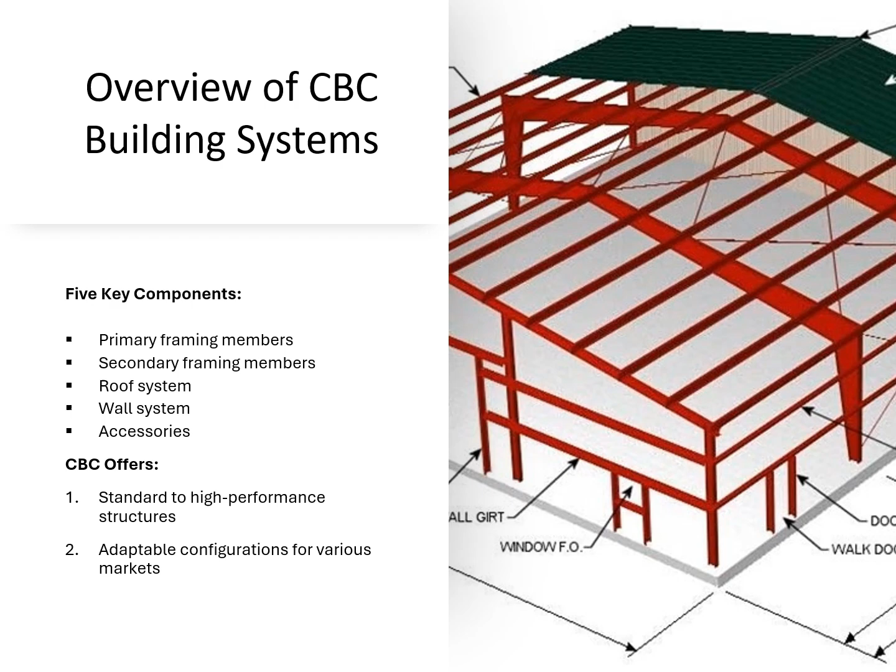At CBC, we offer a wide range of buildings, from those meeting industry standard requirements to high-performance structures with innovative architectural refinements. This versatility allows us to meet our customers' diverse needs and satisfy their unique preferences.

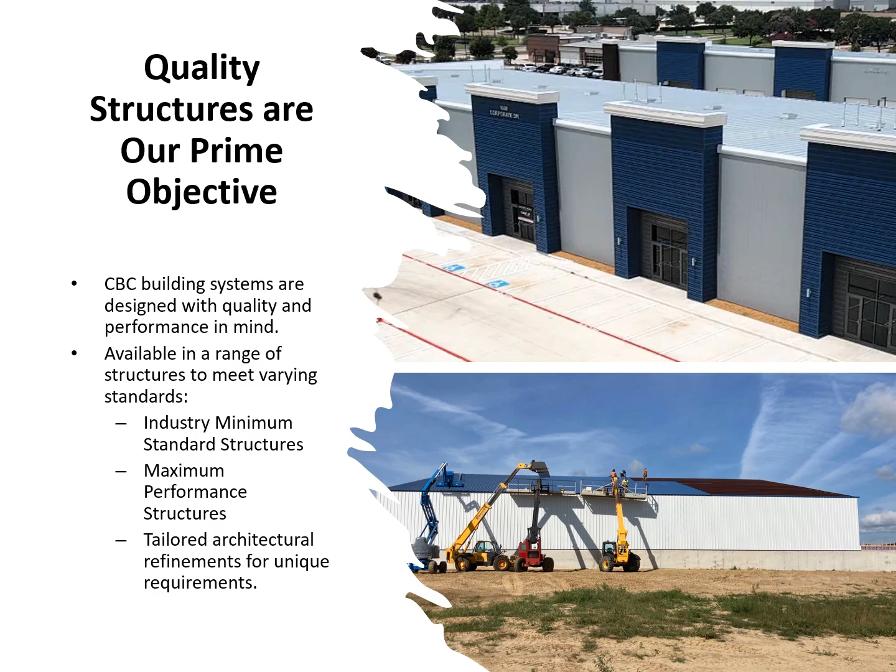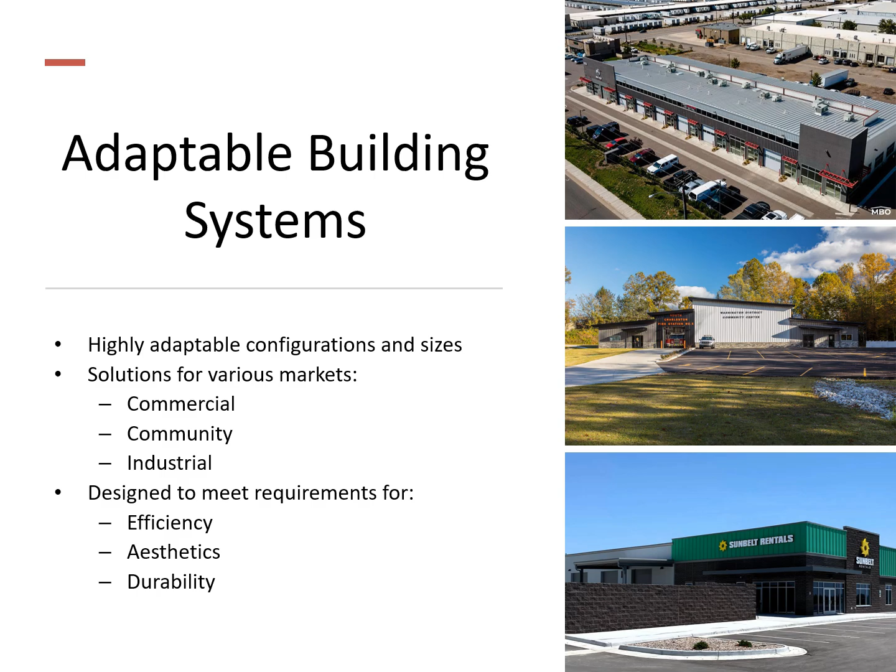Our building systems are also highly adaptable. With various configurations and sizes, they provide solutions for various markets, including commercial, community, and industrial applications. Whether you're looking for efficiency, aesthetics, or durability, CBC has a building system designed to meet your requirements.

In our business, you will often hear the word standard. Standard is a term that is often misunderstood in our industry. For manufacturers like us, a standard is simply a benchmark or starting point for a typical structure, a set of guidelines that help ensure all the parts fit together seamlessly to create a finished product. Most of the time, these are items that are fabricated on the production line and are typically what customers buy.

What happens when a customer needs something non-standard? That is not a problem for our team. In many cases, we can accommodate that need. Our engineers often say, "Nothing is impossible."

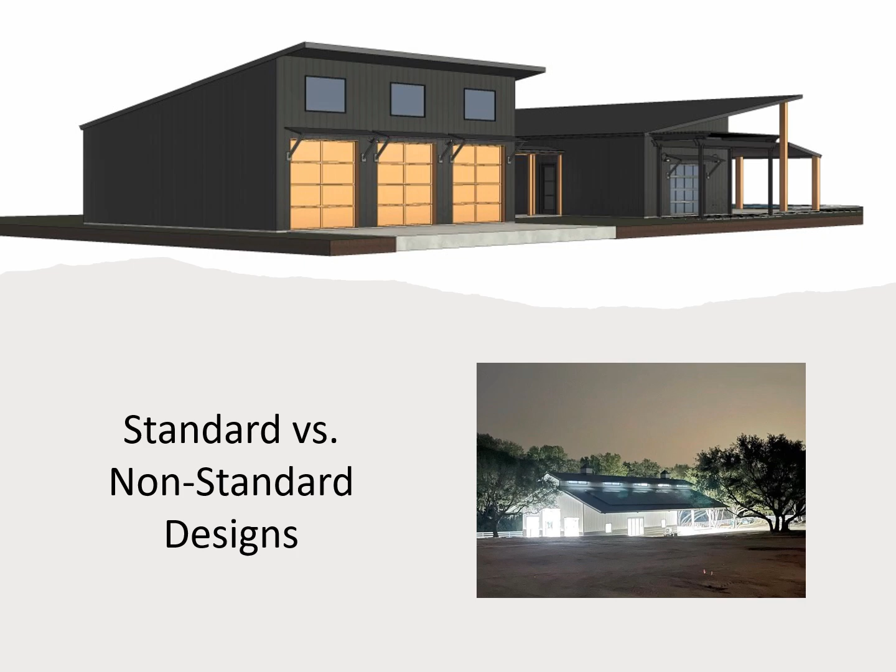Going off-standard can sometimes mean extra work, additional costs, and more time. In many instances, the adjustments are minor, but there are those occasions where the design engineering can get very complex.

Generally, we'll be talking about our standard products, but there are occasions when modifications can be made to meet a customer's specific requirements. Builders might handle these changes through fieldwork or by us directly at the factory.

Here's an important note. Any variation from the standard can impact key factors like loading, strength, and overall design. That's why it's crucial to have these changes reviewed by qualified professionals.

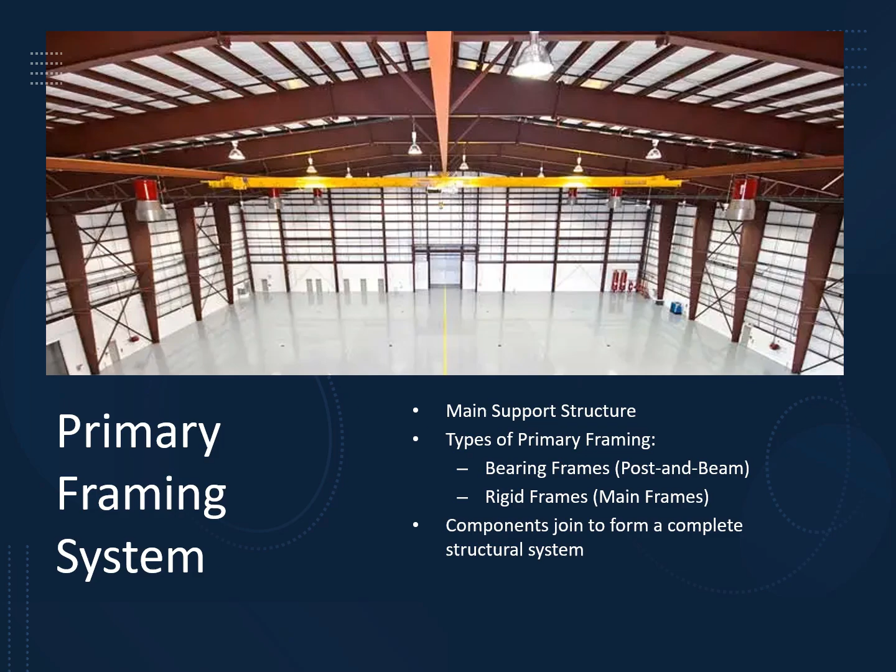Now let's dive deeper into one of the key components of our building system, the primary framing. This serves as the main support structure of a building. Examples of primary framing include bearing frames, also known as post and beam systems, and main frames, such as rigid frames. This section will explore the main frame as a primary framing system and discuss how it works alongside secondary framing members and bracing. These components join to create a complete structural system, ensuring strength, stability, and overall functionality.

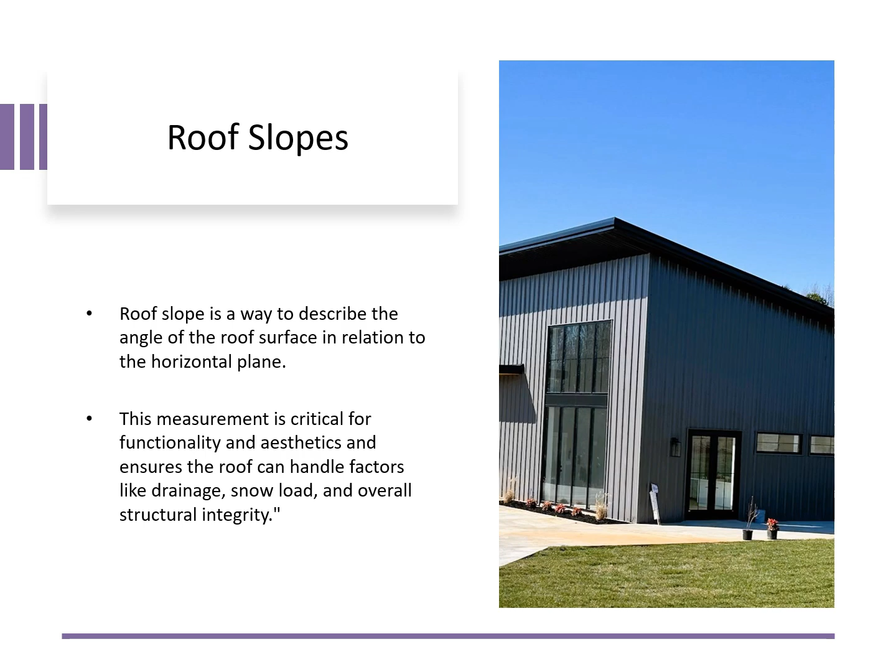Next, let's talk about an essential aspect of building design: the roof slope. Roof slope is a way to describe the angle of the roof surface in relation to the horizontal plane. It's typically expressed as a ratio, like 1/2:12, 1:12, or 4:12.

But what does this mean? Using inches as the basic unit, a 1:12 roof slope means the roof rises 1 inch for every 12 inches of horizontal distance, measured from the side of the building to its peak. In simpler terms, roof slope represents the angle of the roof, how steep or flat it is. This measurement is critical for functionality and aesthetics, and ensures the roof can handle factors like drainage, snow load, and overall structural integrity.

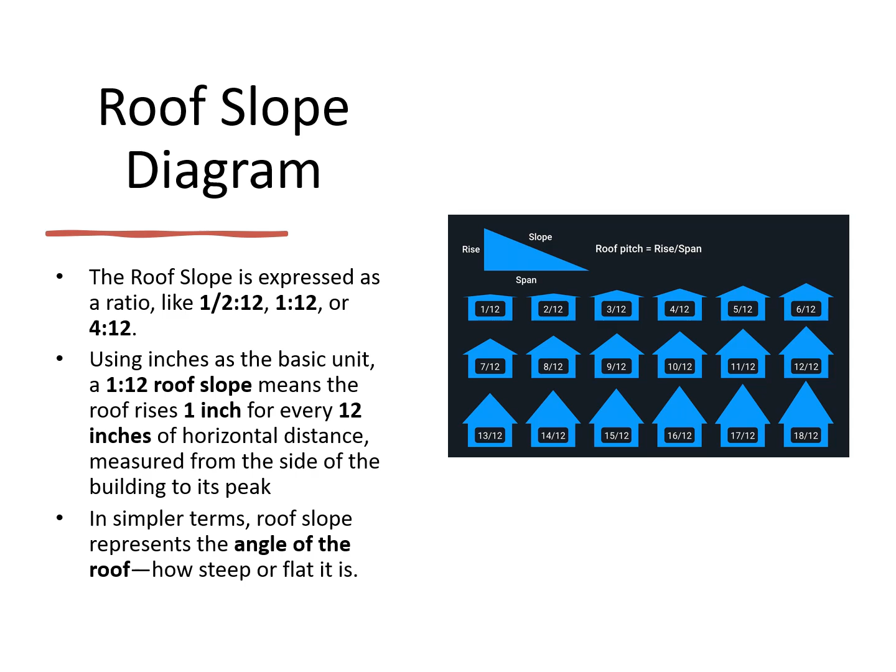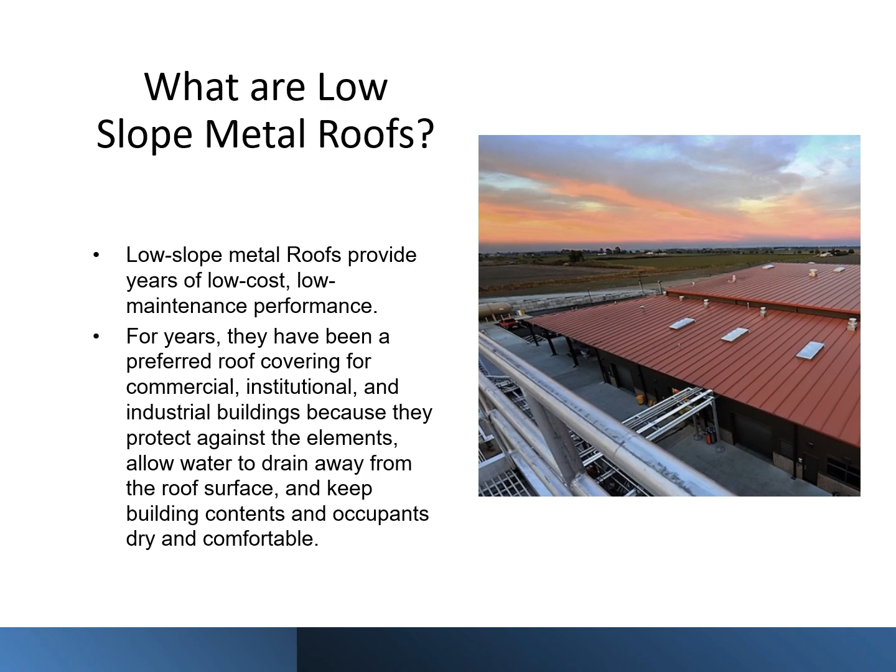Low-slope metal roofs provide years of low-cost, low-maintenance performance. They have been a preferred roof covering for commercial, institutional, and industrial buildings for years because they protect against the elements, allow water to drain away from the roof surface, and keep building contents and occupants dry and comfortable.

Steep-slope metal roofs offer long-term performance as well as long-term beauty. More owners and architects require an attractive and affordable steep-slope roof covering for commercial building projects, and more will likely choose a metal roof.

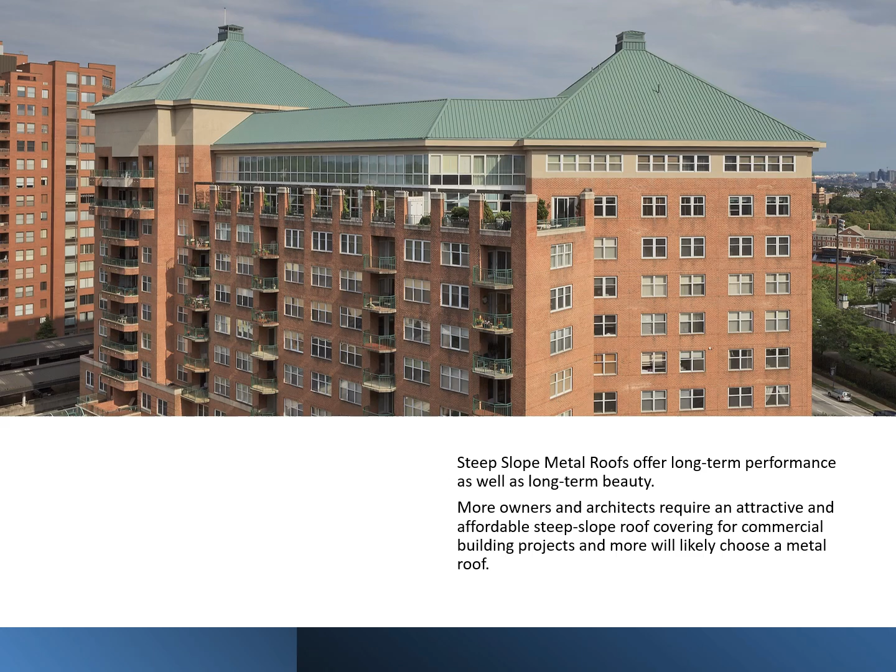Now let's focus on the main frame, also known as the rigid frame, which is the primary structural member of the building system. The rigid frame is unique because of its structural stability, which comes from the rigidity of its connections. Each member is joined so that the entire frame works together as a single, cohesive unit, distributing loads evenly and ensuring durability.

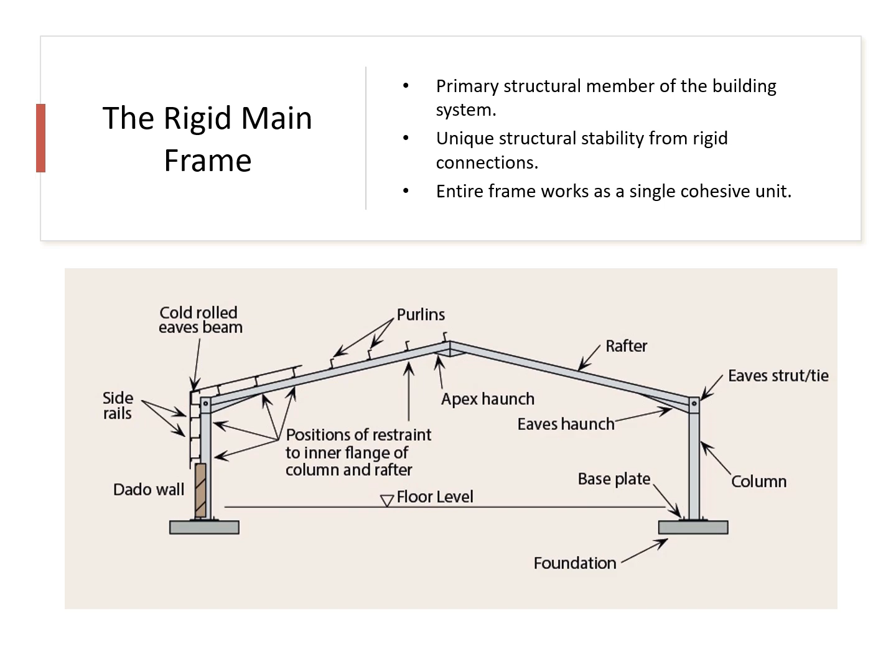Let's take a closer look at the knee haunch area of the main frame, which plays a critical role in the building's structural integrity. This is the deepest section of the main frame, making it the strongest part. The design is primarily driven by the need to handle vertical loads, but it also provides the lateral strength needed to resist forces like high winds or earthquake shocks.

What does this mean? This means the strength built into the frame for vertical loads is also available to carry lateral loads. The inside flange of the knee is under compression, creating a thrust at the inside corner that is both upward and outward. To counteract this, stiffeners are used.

These stiffeners extend to the outside flanges and also work to stiffen the entire web, while the haunch connection acts as an additional stiffener. The knee haunch area is where the column connects to the roof rafter. This connection rigidly ties the members together, allowing the structure to act as a single unit that supports all loads, whether vertical or lateral.

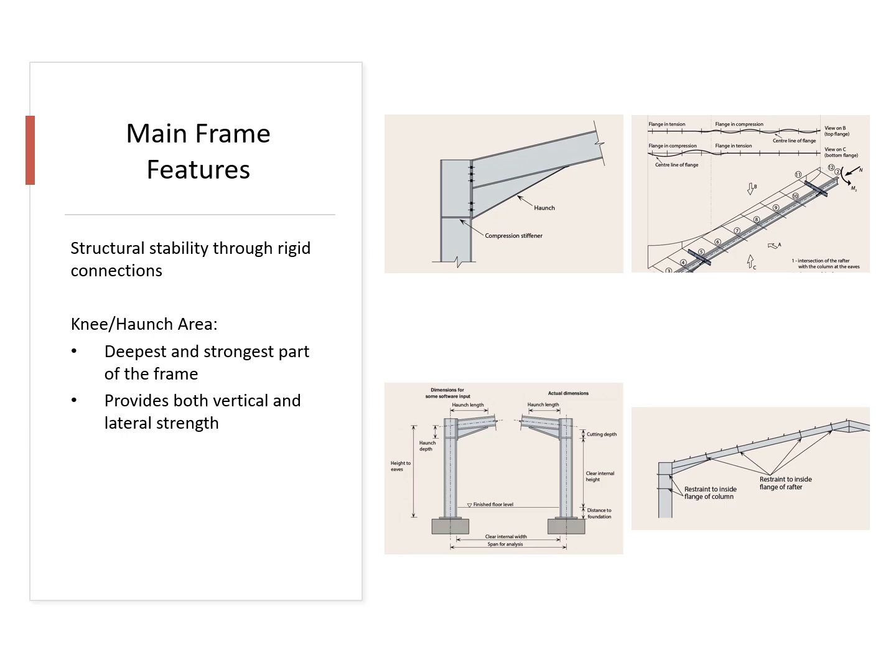Now imagine a large hand pushing down or pulling up on the roof rafter of a main frame at its peak. Because the main frame is a continuous structure, this force causes the base of the columns to kick outward or inward, depending on the load type.

A properly designed concrete foundation counteracts these thrusts. It's important to emphasize the role of qualified engineers in this process. A well-designed foundation is based on reaction charts provided by CBC, ensuring the foundation is both economical and structurally sound.

Unfortunately, some buildings in use today have improper foundations because the designer was either unqualified or didn't reference the reaction charts from the manufacturer. To prevent this, CBC provides reaction charts with building drawings for various loading conditions and preliminary column reactions through our pricing program.

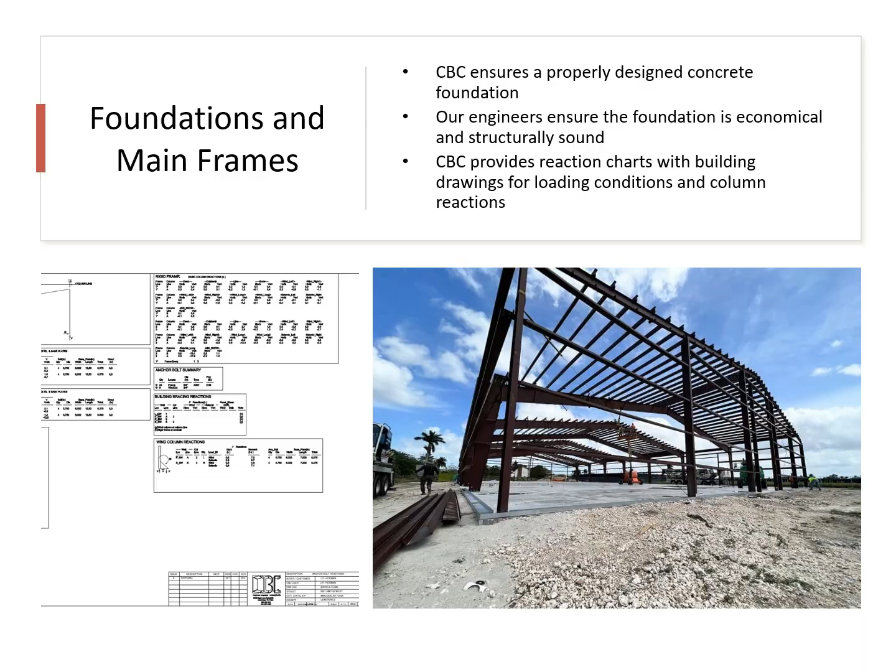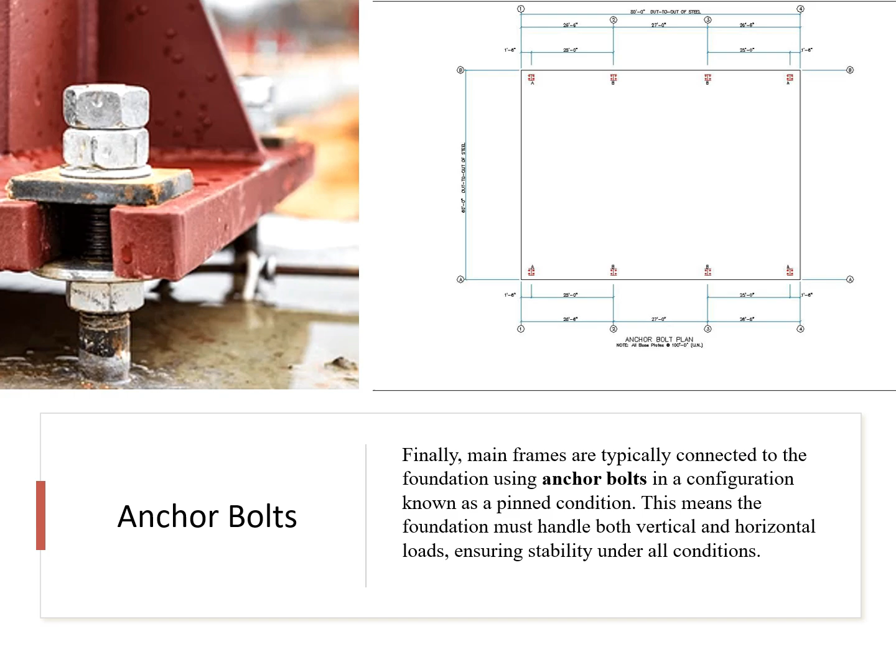Finally, main frames are typically connected to the foundation using anchor bolts in a configuration known as a pinned condition. This means the foundation must handle both vertical and horizontal loads, ensuring stability under all conditions.

Let's revisit the main frame, which serves as the primary structural member and provides the main support of a building. Now let's talk about bays, a key concept in building design. A bay is a distance between main frames, measured from one column's center line to the next center line.

In CBC's building systems, the standard and most economical bay lengths are 20 feet and 25 feet. This means a building's length is typically a multiple of either 20 or 25. For example, a building with 4 25-foot bays would be 100 feet long.

While 20 and 25-foot bays are standard, CBC also accommodates bay lengths ranging from 10 to 30 feet, offering flexibility to meet different building requirements.

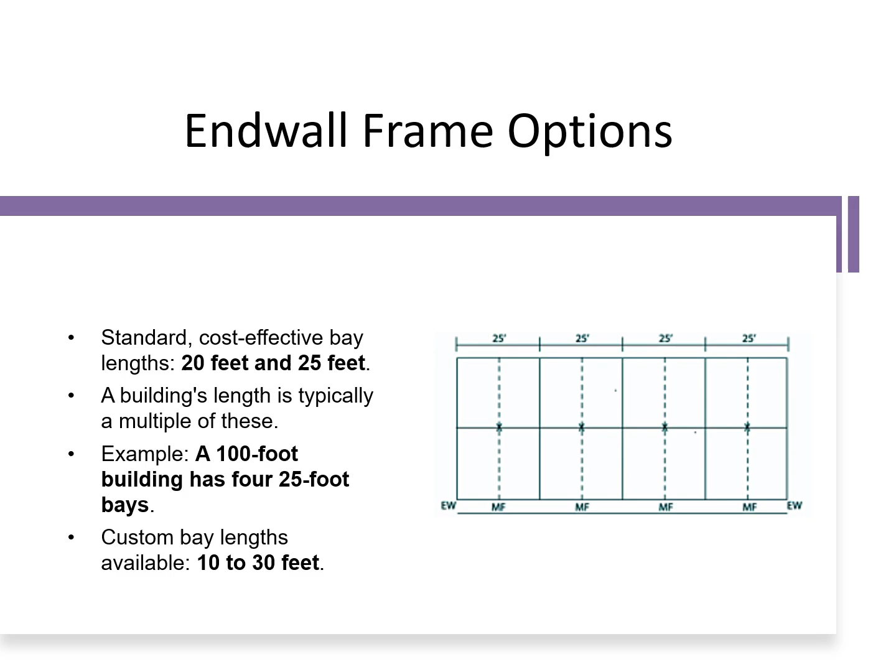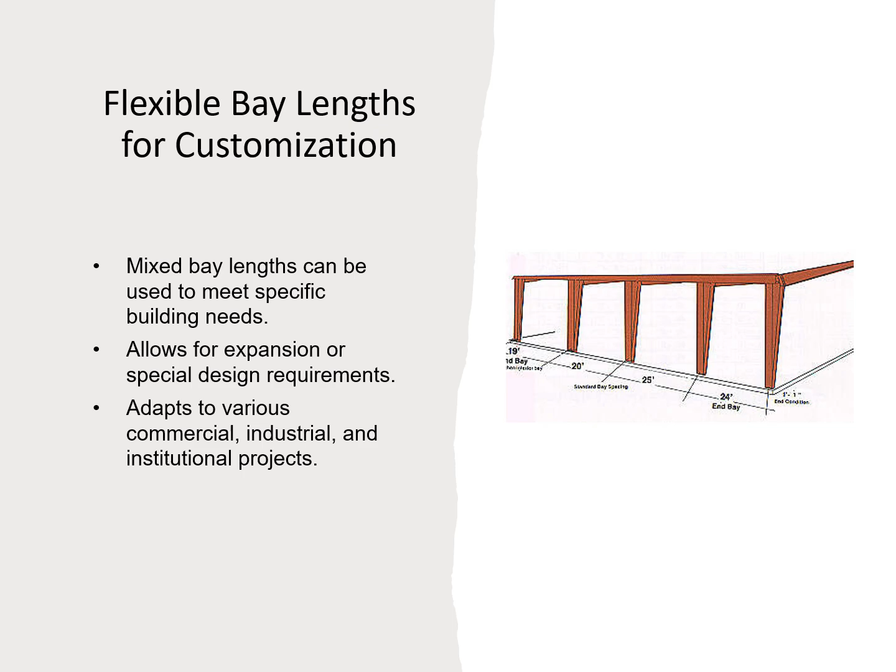Additionally, mixed bay lengths can be used to achieve custom building lengths. Having mixed bay lengths allows for expansion and special design requirements that adapts to various commercial, industrial, and institutional projects.

Looking at the example on the screen, we see a 100-foot-long building of 4 25-foot bays. The main frames, MF, support a roof area of 2 half bays. However, the end wall frames, labeled as EW, only support 1/2 bay of roof load. Because of this difference in load, end wall frames don't need to be as strong as main frames.

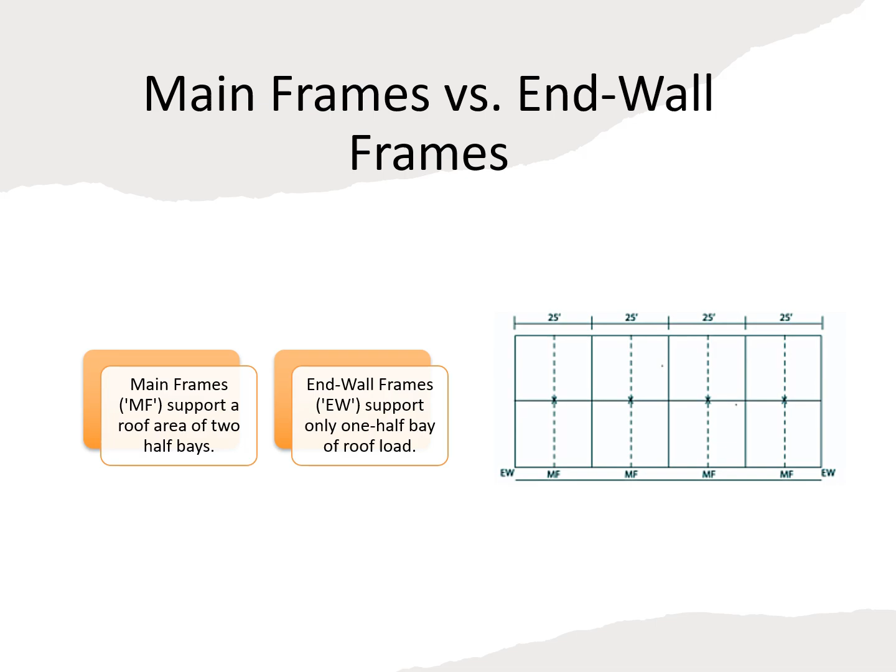When designing a metal building, end wall selection is a critical consideration. At CBC, we offer 3 standard options, each designed to meet different structural and expansion needs. First, the bearing frame end wall.

The bearing frame is the standard wall framing used in most metal buildings. It provides essential load-bearing capacity, supporting both the walls and the roof. This is an economical choice for buildings that do not require future expansion.

Second, the expandable mainframe end wall. For projects that anticipate future growth, the expandable main frame is the ideal solution. This frame is engineered with extra structural strength, allowing additional bays or expansions to be added later without compromising stability.

Third, the non-expandable main frame end wall. The non-expandable main frame is designed to handle the initial building load only. Unlike the expandable option, it does not support future additions, making it suitable for buildings with a fixed footprint.

Choosing the right end wall: when selecting an end wall type, it's important to consider load capacity requirements and future expansion plans. At CBC, we ensure that every building system remains flexible, cost-effective, and tailored to meet the unique needs of your project. Let us help you design a building that fits both your current needs and future growth.

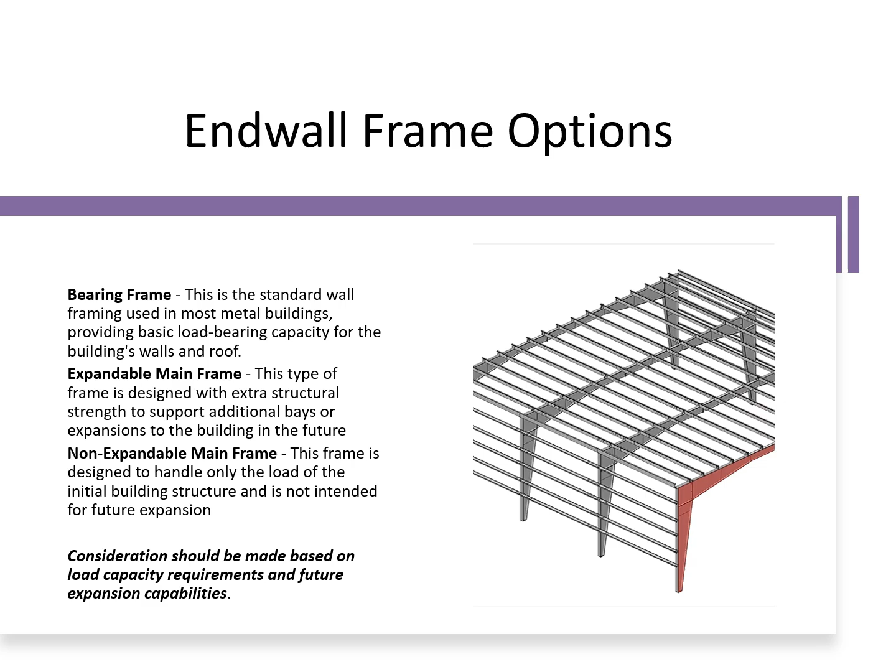Let's take a closer look at the different types of end wall conditions available in CBC's building systems, starting with the bearing frame end wall, also known as the post and beam end wall. This is our standard end wall configuration.

In a bearing frame, the end wall columns are typically made from C-channels, which may sometimes be configured as back-to-back C-channels for additional strength. Bearing frames are designed to support only half a bay of roof load, making them an economical choice. However, because of their design, bearing frames cannot be used to expand the building in the future.

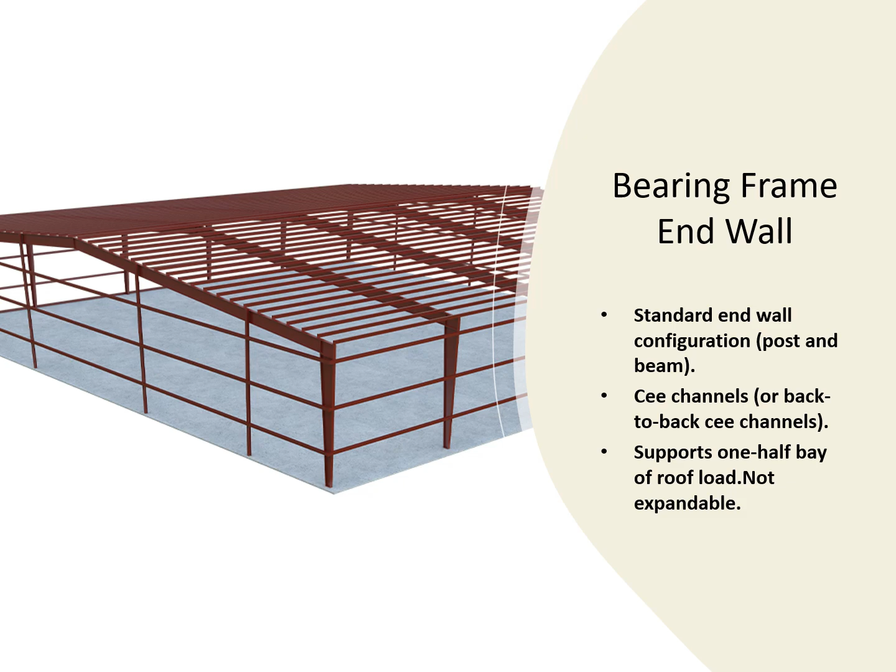Next, we have the expandable main frame end wall. This option is engineered to support a full bay of roof load and is also designed to support an additional half bay in the future, making it ideal for projects that anticipate future growth.

The third option is the non-expandable main frame end wall, which supports half a bay of roof load, similar to the bearing frame. However, unlike the expandable version, this configuration cannot support an additional half bay in the future.

It's also important to note that the main frame end walls, whether expandable or non-expandable, do not require bracing. This design feature ensures the end wall bays are clear, making them suitable for large framed openings or open wall conditions where flexibility is needed. Each of these options provides a solution tailored to specific project needs, balancing cost, load requirements, and future expansion potential.

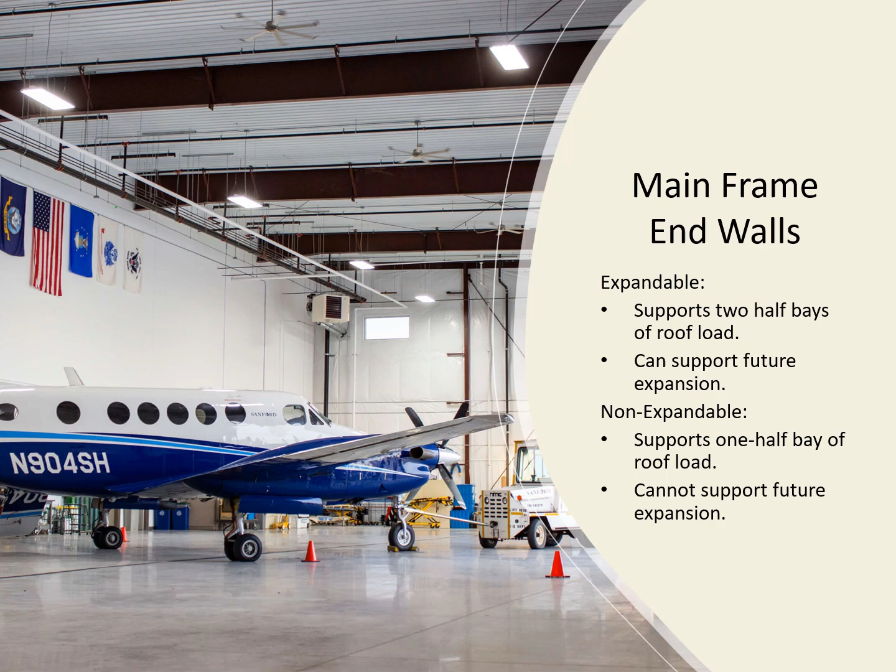Now let's talk about secondary framing members, which play a crucial role in the building system. These components connect the primary framing members to form the building bays and provide the necessary support for attaching the walls and roof. The key secondary framing members include purlins, girts, eave struts, and bracing.

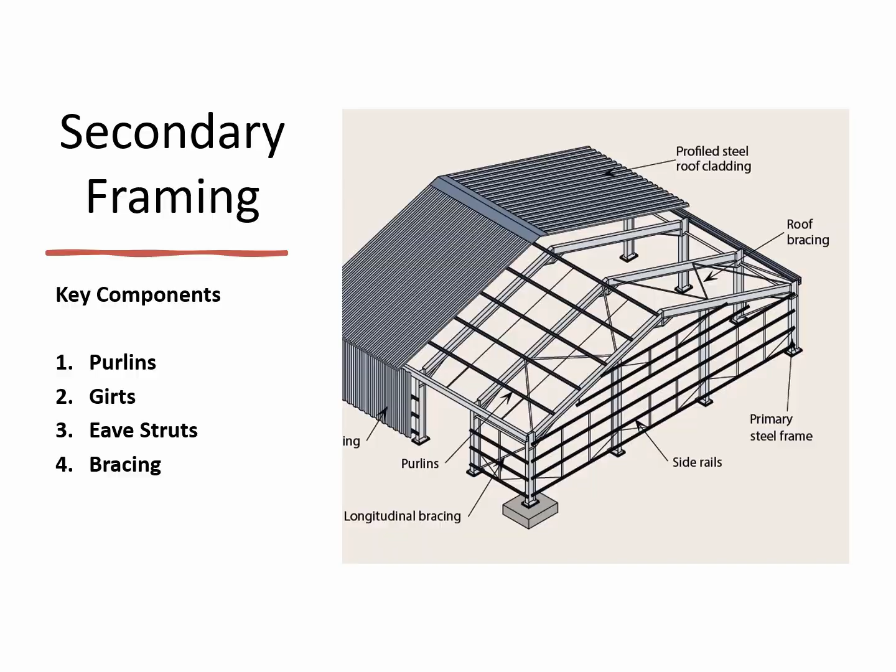Let's first examine the eave strut, a C-shaped cold-form member. Cold forming is a process in which steel is shaped into the desired cross-sections at room temperature using press brakes or rolling mills. This technique ensures precision and strength in the final product.

The eave strut is an essential part of the building system because it is an attachment and bearing point for the ends of the roof and wall sheets. To ensure compatibility with purlin depths, eave struts are available in nominal depths of 8 inches, 10 inches, and 12 inches. All eave struts are pre-punched at the factory for easy installation, allowing them to be quickly and securely bolted to the main frames. These secondary framing members help create a durable and functional building by connecting and supporting key elements of the structure.

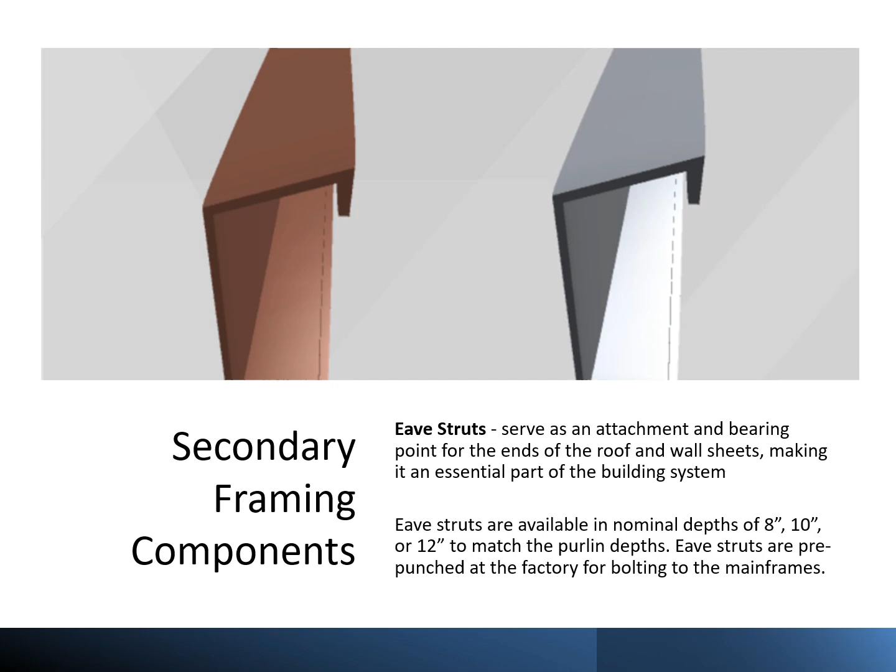Let's dive deeper into purlins, a critical secondary framing member in our building systems. A purlin supports the roof panels and transfers the roof loads to the rafters, ensuring the roof's structural integrity. Purlins are designed in a Z-shape and come in depths of 6 inches, 8 inches, 10 inches, or 12 inches. Steel gauges of 16, 14, or 12 are used to accommodate various loading conditions. These options provide flexibility to meet the specific demands of different projects.

One common type is the continuous purlin, which is also a Z-shaped cold-formed member available in depths of 8 inches, 10 inches, or 12 inches. It features a 50-degree outer lip for easy nesting. At each interior frame, the purlins are lapped, with the lap length varying from 8 inches to 60 inches, depending on the design conditions. The continuous purlin offers a significant design advantage by acting as a continuous beam.

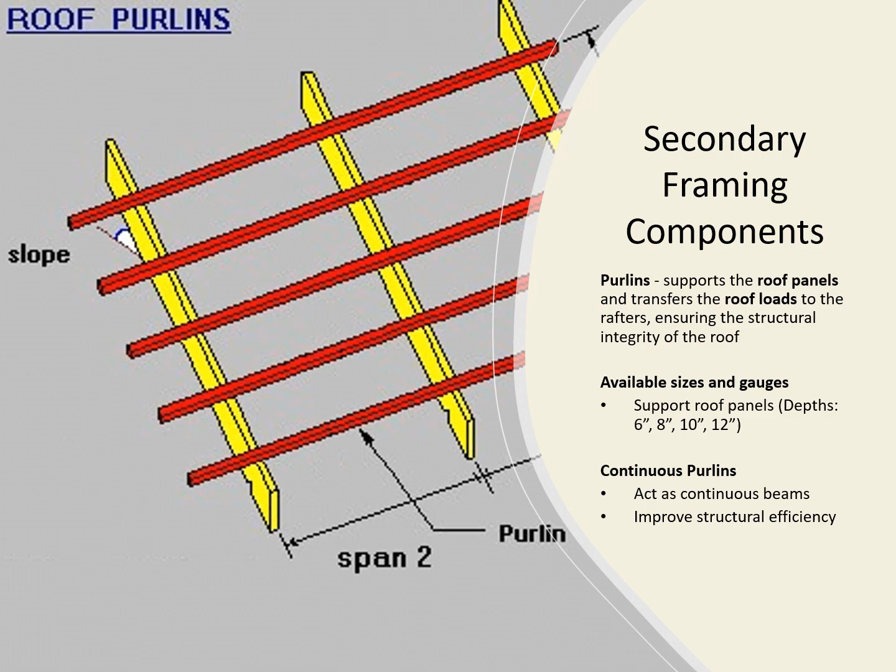This setup improves structural efficiency and distributes loads more effectively. It's more economical in buildings with multiple bays, where the purlin's overlapped splice extends over the rafter, helping support the load of the adjacent bay. Purlins are vital components in creating a durable and efficient roof support system because they combine strength, versatility, and cost-effectiveness.

Now let's focus on girts, another important secondary framing member in CBC's building systems. Girts run horizontally between mainframe and end wall columns, providing support and a connection point for wall panels. Similar to purlins, girts are Z-shaped members available in depths of 8 inches, 10 inches, or 12 inches, and steel gauges of 16, 14, or 12 to meet different loading requirements.

Standard girt spacing begins with the first girt, placed 7 feet 4 inches above the finished floor, with a maximum spacing of 6 feet thereafter. This standard spacing is optimized for doors and other structural elements, ensuring a balance of strength and design efficiency.

Custom spacing options are also available for projects with specific requirements. A low girt option can be used in high wind conditions or when additional wall stiffness is needed. This girt is placed at 4 feet above the finished floor, enhancing the wall section's overall stability.

For both girts and purlins, CBC applies a factory-baked red oxide finish. This pre-painted coating gives a smooth, attractive appearance and improves adherence and durability, ensuring long-lasting performance. Additionally, CBC welds all girt clips to the frames at the factory, making field assembly faster and more efficient. With these features, girts provide strength, flexibility, and ease of installation, contributing to the overall efficiency of our building systems.

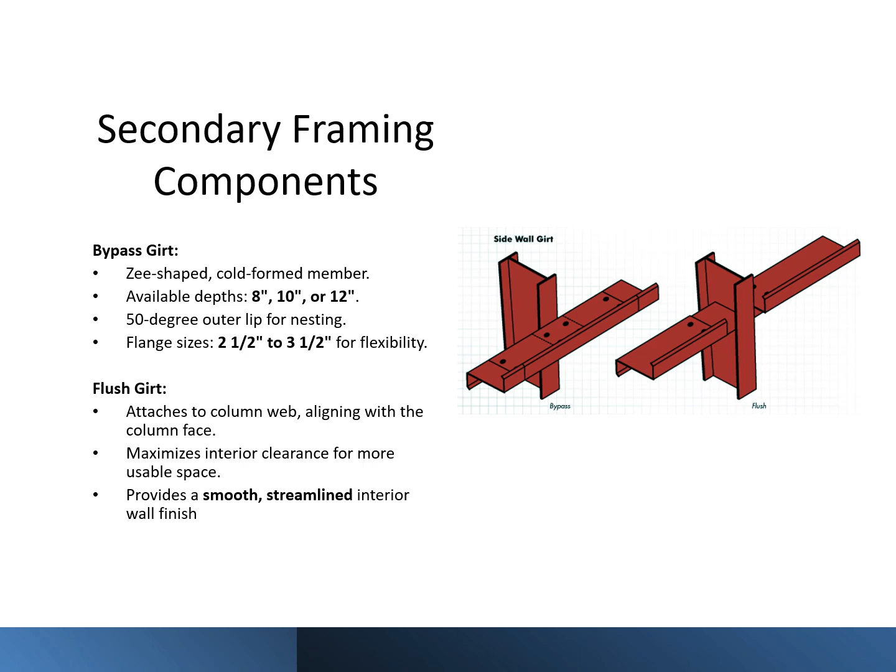Let's focus on flange braces, a critical structural component in CBC's building systems. Flange braces attach to purlins, girts, and eave struts to prevent the main frame from twisting or buckling laterally under load. These braces are essential for maintaining the structural stability of the building.

Flange braces must be installed correctly at all designated locations to ensure optimal performance. Neglecting their proper placement can compromise the building's integrity. Flange braces are beneficial during the erection process in addition to their structural role. They help align purlins and eave struts, making roof installation more straightforward and cost-effective.

Another type of bracing is purlin bracing, which connects the bottom flange of adjoining purlins using angled members. This setup prevents purlin rolling and adds further stability to the roof structure. By combining flange braces and purlin bracing, CBC's systems ensure both durability and ease of construction, keeping the structure safe and efficient from installation to operation.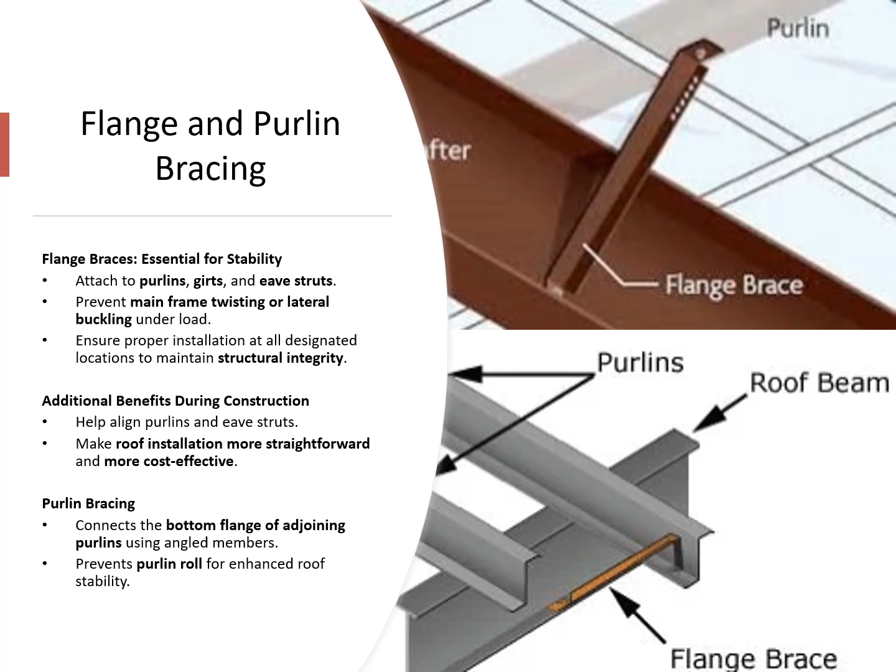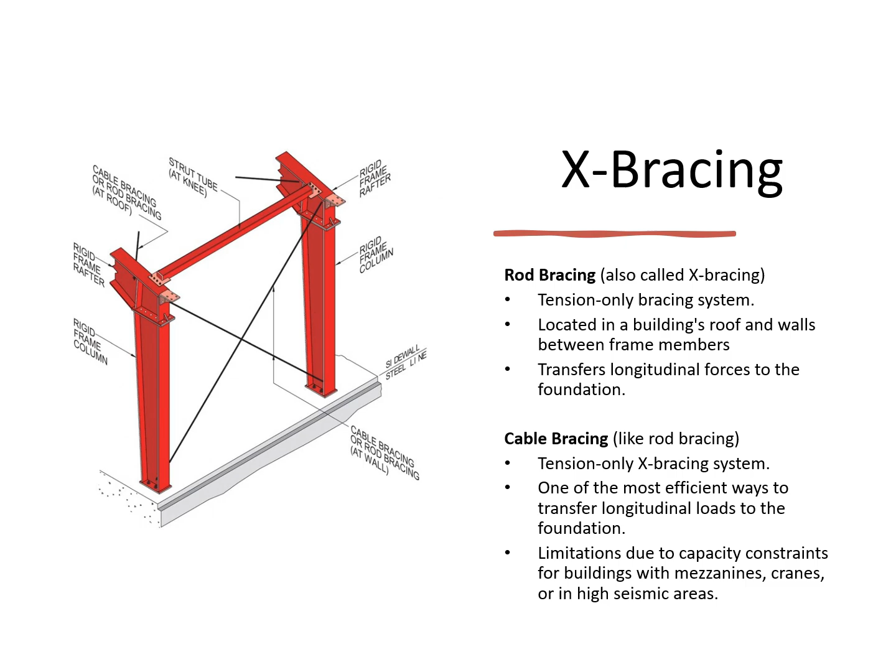However, one important consideration is that X-bracing can create an obstacle for openings like doors and windows when placed within a bay. It is most commonly used in a building's roof and walls between frame members, helping to reinforce the structure against lateral forces. For smaller, low-rise buildings, X-bracing is one of the most efficient ways to transfer loads to the foundation. However, it does have some application limitations, particularly for buildings that include mezzanines, cranes, and high seismic load requirements. In these cases, alternative bracing methods may be required to accommodate structural needs while maintaining stability and load resistance.

In cases where bracing is required but would interfere with doors, windows, or other building accessories, an alternative solution is the portal frame. A portal frame is a rigid frame structure that spans a bay, typically positioned between two main frames. It consists of two upright columns which attach directly to the main frames, and a horizontal beam which connects the uprights, adding longitudinal stability to the sidewall bays.

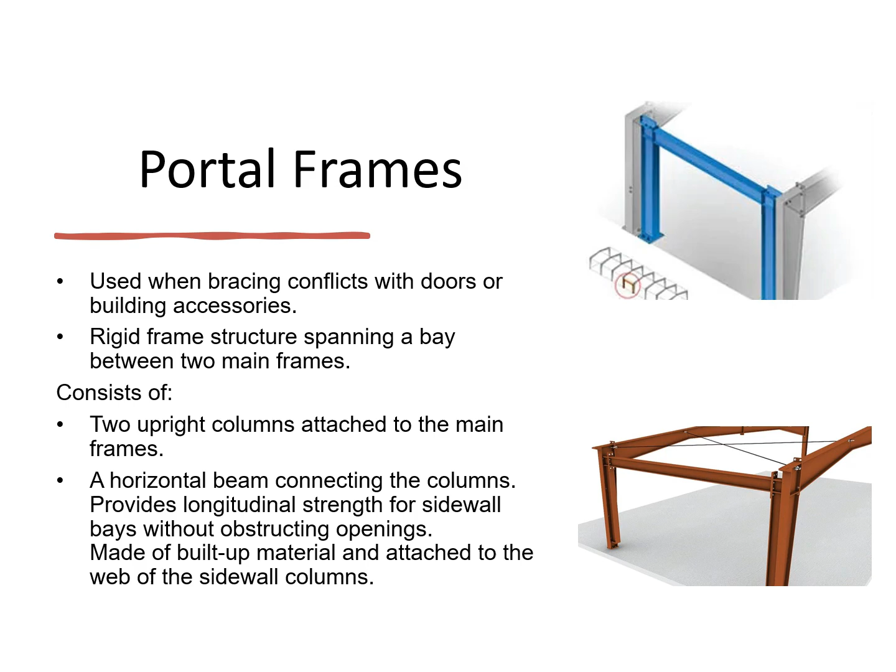The last type of bracing we will cover is the use of wind columns. One of the considerations given to selecting a wind column for your steel building bracing is what it requires for the steel building foundation. The main frame columns always require a pier to be poured for building support. When the wind column is added, that pier can become quite large.

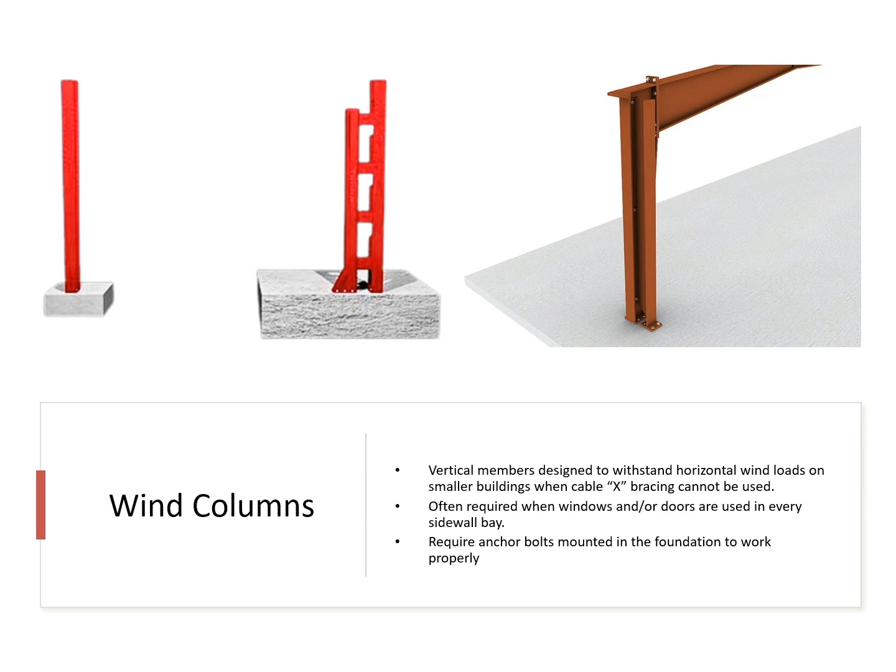Let's talk about how CBC ensures the durability and protection of its framing members through coatings and finishes. All primary framing members are factory cleaned to remove dirt, grease, mill scale, and other residues. After cleaning, they are coated with a red oxide primer that meets or exceeds federal specifications. This primer serves as a temporary protective layer during transportation and erection. While the primer provides good protection, some touch-ups may be necessary after erecting the building.

In addition to its protective properties, the red oxide primer offers a chemical and corrosion-resistant surface. While applying an additional finish coat is unnecessary, it's an option if desired. However, before using any finish paint, it's essential to consult with the paint supplier to confirm compatibility and prepare the steel properly. Testing a small patch is also recommended to ensure the finished paint adheres correctly.

Secondary framing members, such as purlins and girts, are pre-painted by the supplier with a baked-on red primer. This special coating is designed for roll forming and is highly durable but can be challenging to repaint.

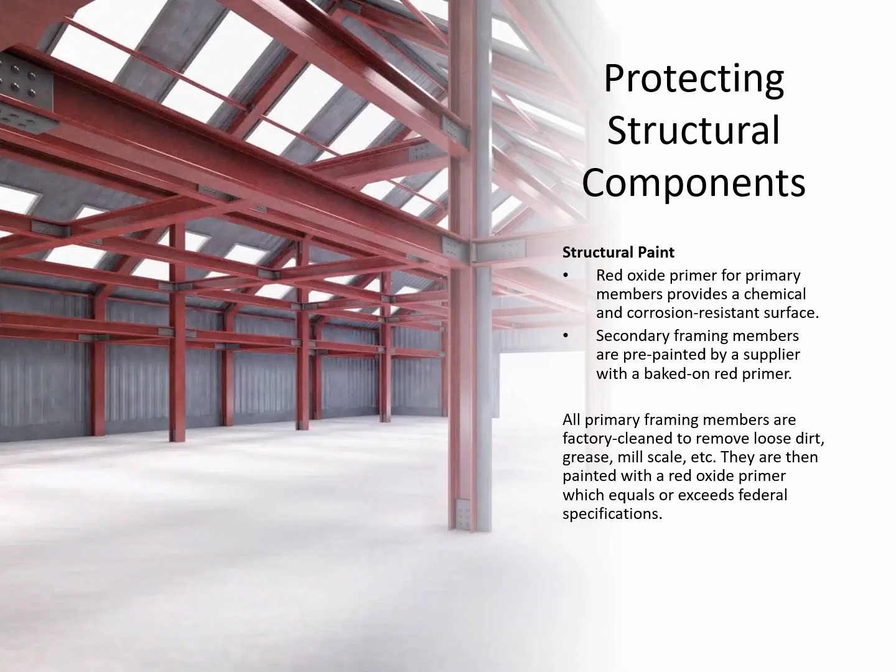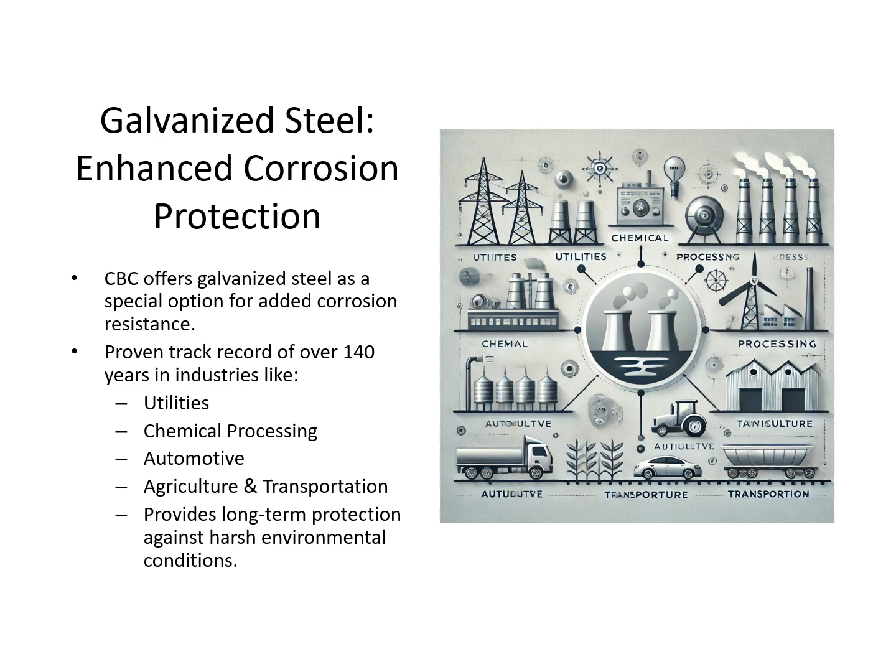For projects requiring enhanced corrosion protection, CBC offers all building systems in galvanized steel as a special option. Galvanizing has a proven track record of success, with over 140 years of commercial use in industries like utilities, chemical processing, automotive, agriculture, and transportation. It provides an effective barrier against corrosion, ensuring the longevity of steel in even the harshest environments.

CBC uses two types of galvanized materials to meet the specific needs of different applications, offering tailored solutions for customers seeking added durability. Now let's dive into the two types of galvanized materials offered by CBC: hot dip galvanizing and pre-galvanizing.

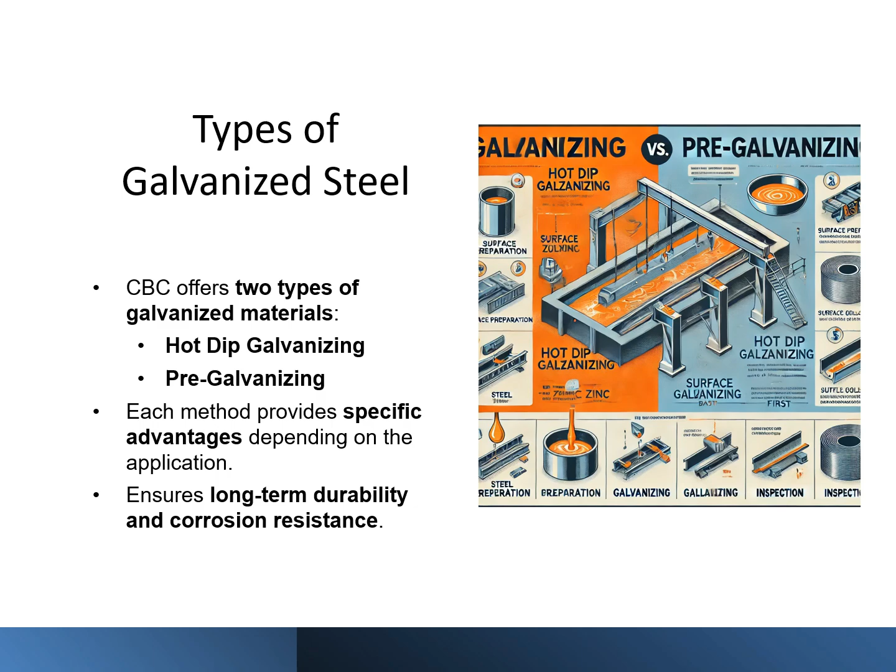Hot dip galvanizing involves applying a zinc coating to fabricated iron or steel by immersing the material in a bath of molten zinc. This process is used for primary and secondary members, ensuring excellent corrosion resistance. The hot dip galvanizing process consists of three key steps: 1. Surface preparation - this is essential for proper adhesion of the zinc coating. 2. Galvanizing - the steel is dipped into the molten zinc bath, creating a robust protective layer. 3. Inspection - the finished product is carefully examined to meet quality standards.

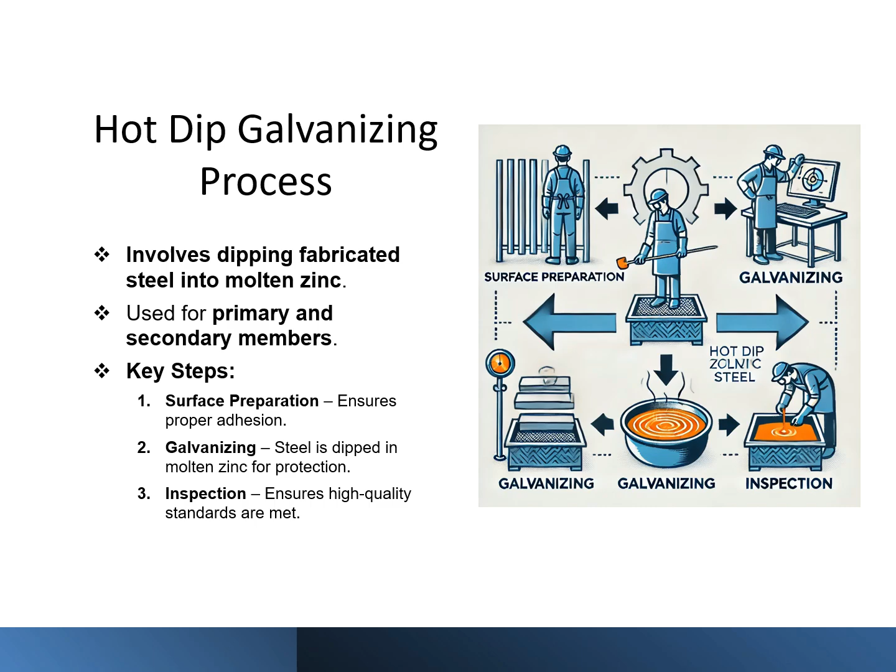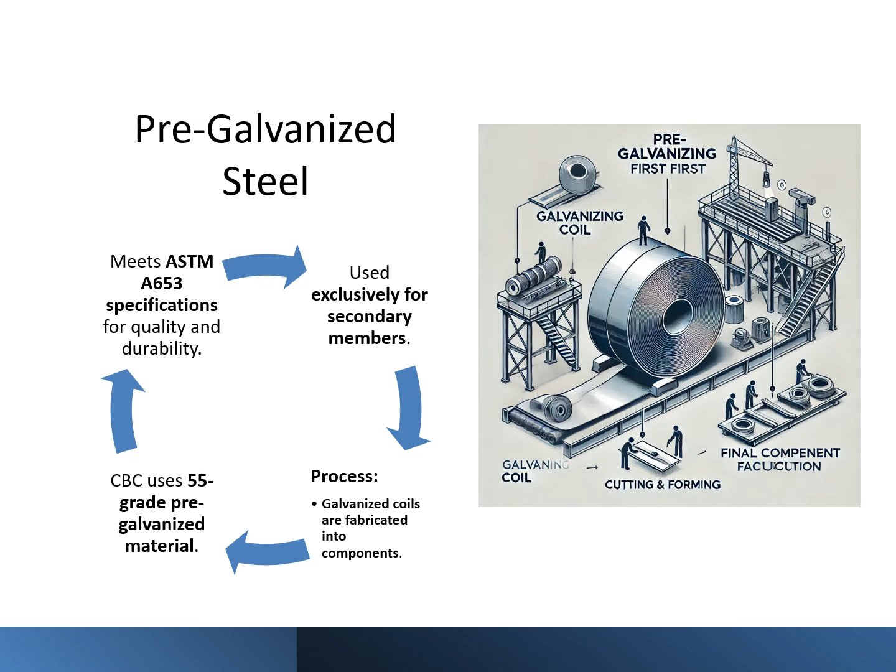On the other hand, pre-galvanized material is used exclusively for secondary members. Unlike hot dip galvanizing, where fabrication occurs before galvanizing, pre-galvanized material starts as galvanized coils and is fabricated into components. CBC uses 55-grade pre-galvanized material, which adheres to ASTM A653 specifications, ensuring consistent quality and durability.

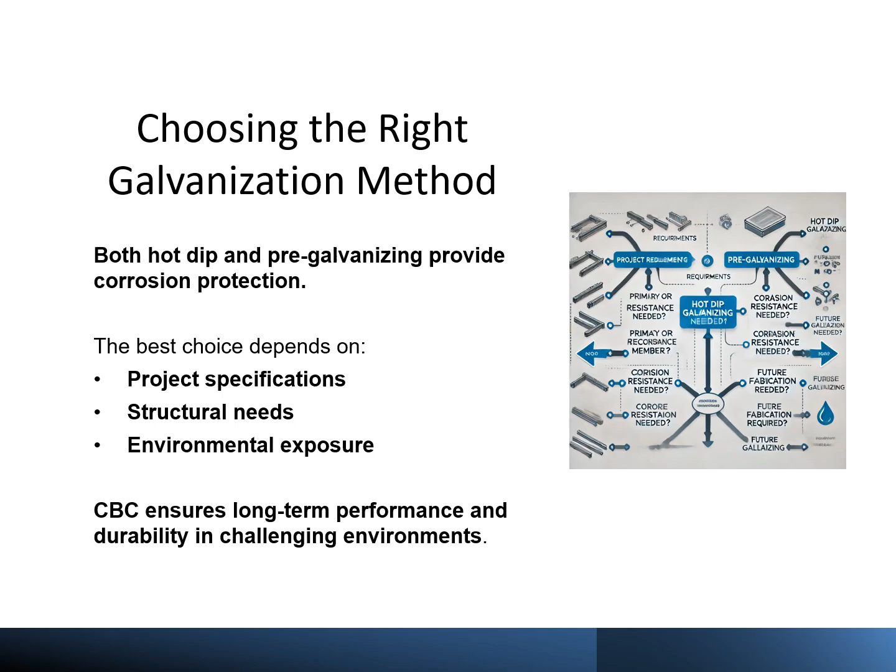Both galvanizing methods provide reliable corrosion protection, but the choice depends on the project's specific needs. With these options, CBC offers solutions that deliver long-term performance and durability, even in the most challenging environments.

Let's talk about load transfer, a fundamental concept in rigid frame building design. No matter the type of load or where it's applied, every load in a rigid frame structure is transferred from part to part and ultimately to the foundation.

For example, imagine a person standing on the roof. Their weight is directly on the roof panels, but the load doesn't stop there. The panels transfer the weight to the nearest purlins, with the closest purlins bearing the most significant part of the load. From there, the load moves to the rafter, then to the column, and finally down to the foundation.

At the base of the column, the load becomes a combination of a vertical load and a horizontal thrust, often referred to as a side kick. These horizontal thrusts can be substantial and must be carefully addressed when designing foundations for rigid frame buildings.

Now, consider wind loads acting on the sidewall of the structure. These forces not only produce horizontal thrusts, but can also cause uplifting on the main frame. This demonstrates why foundations for rigid frame buildings must be designed to support vertical loads and horizontal or outward thrusts.

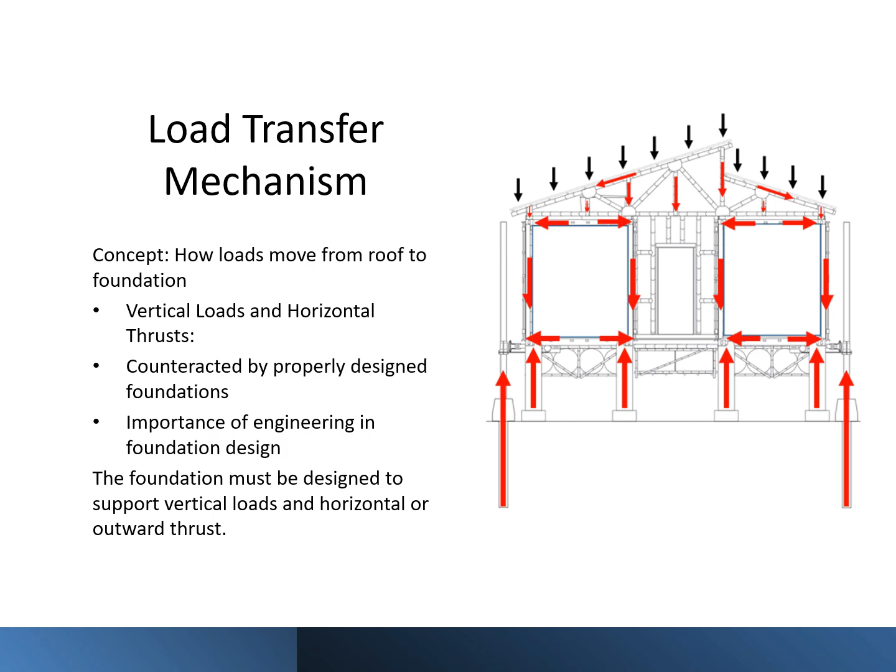Congratulations on completing the first module of our training program. In this module, we explored the essential components of a CBC building system, including primary and secondary framing members, roof slopes, girts, purlins, and bracing. We also discussed coatings and finishes, the role of galvanization, and how loads are transferred throughout the structure down to the foundation. By now, you should understand the key building elements, their purposes, and how they work together to create a durable and efficient structure. This foundation of knowledge will help you better understand the design, construction, and functionality of our building systems as we move forward. Remember, a building's strength and efficiency start with the design and proper integration of its components. With this knowledge, you're well equipped to tackle the next stages of our training. Thank you for your attention, and we look forward to continuing this journey in the next module.

Welcome to the review session for Module 1. In this review, we'll test our understanding of the key concepts covered, reinforcing our knowledge of CBC's building systems. Let's dive in and see how much we've learned.

Question: Secondary framing members include purlins, girts, eave struts, bracing, and main frames. True or false? The answer is false. While purlins, girts, eave struts, and bracing are secondary framing members, main frames are not. Main frames belong to the primary framing system, which provides the main structural support of the building.